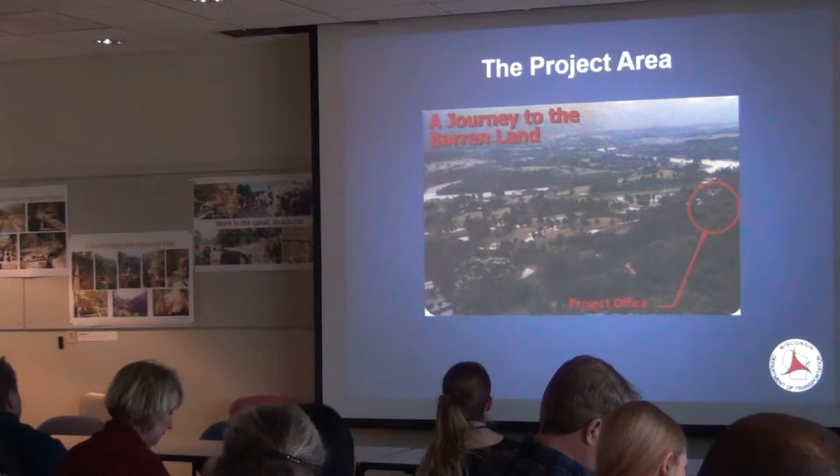I started my journey with great enthusiasm and a very strong attitude. It was to do something for the farmers and to make their life better. For me, it was like a marathon that I needed to win by making water available in their land.

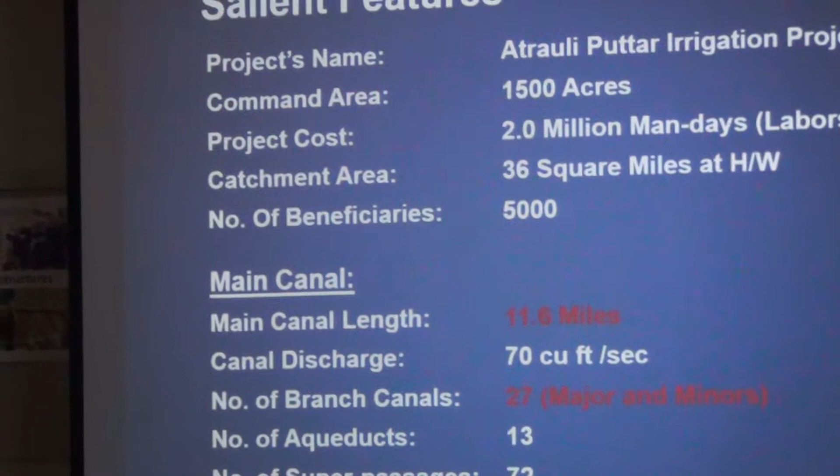Here are the salient features. The project name is Atrauli Puttar Irrigation Project. Command area, in round figures, 1,500 acres. And the project cost, I calculated in terms of labor days, 2 million labor days.

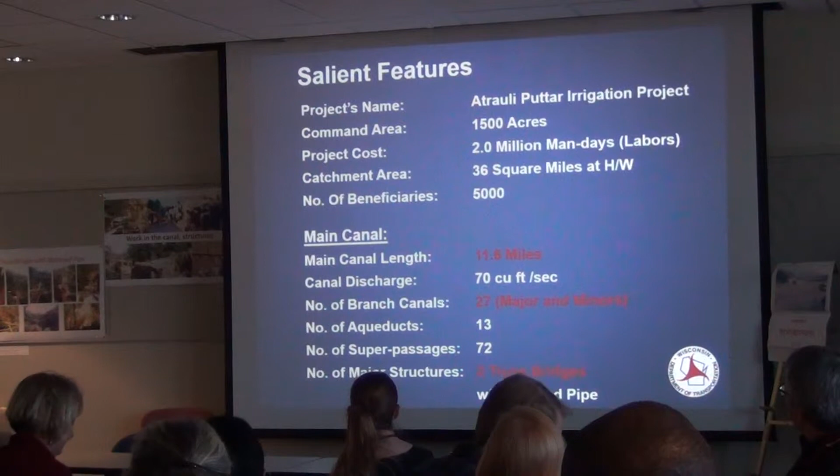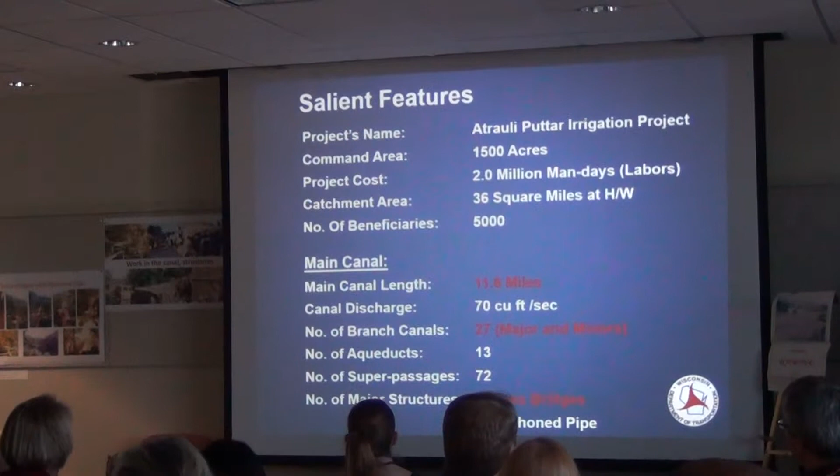Catchment area, 36 square miles, and the number of benefited farmers is 5,000 villagers. Main canal, 11.6 miles, and there are 27 branch canals. There are 2 challenging structures. They are a truss bridge and a siphon pipe.

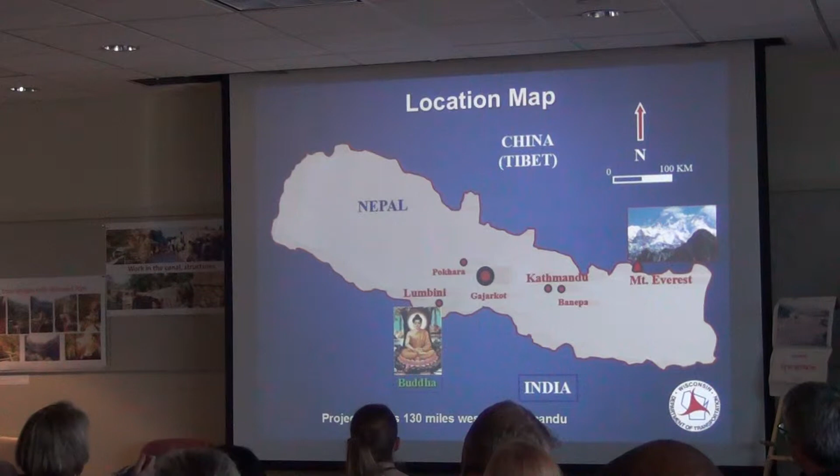Here is the location map, Nepal. In between India and China. Bounded by India from three sides, and separated from China by the high Himalayas. This is the project area. And just calculating, I know that it's less than 250 miles; aeronautical might be less than 250 miles. And again, it's less than 150 miles from Lumbini.

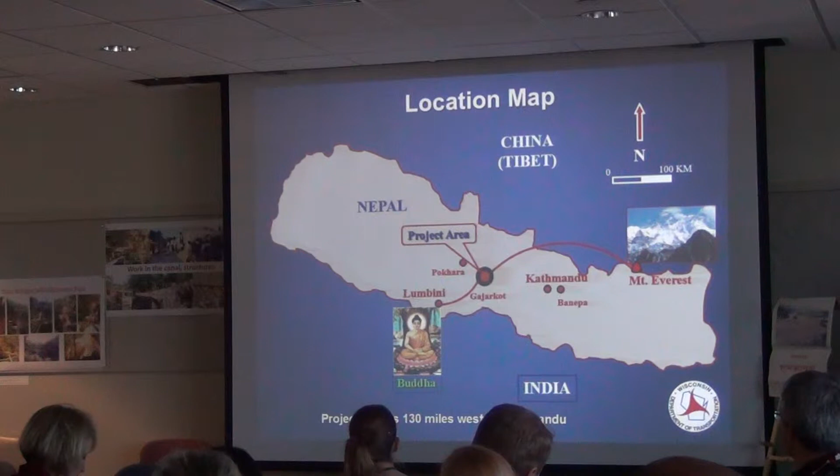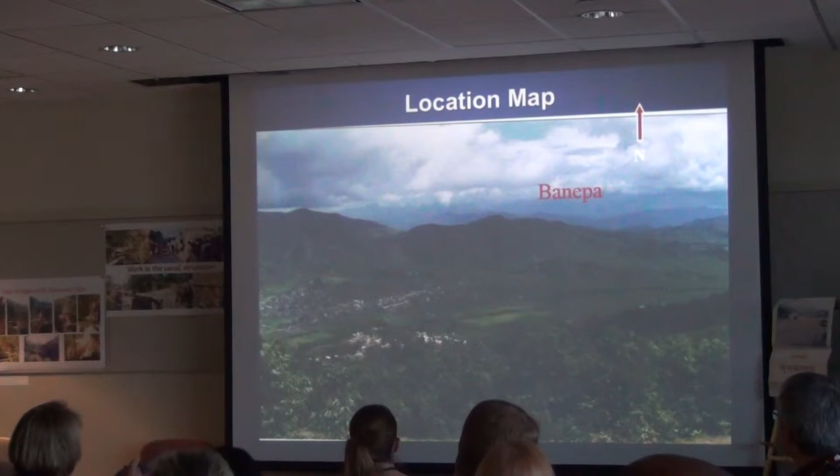Lumbini is the birthplace of Buddha. Buddha was born in Nepal. And it's 130 miles from Kathmandu, the capital. And I talked about my hometown, and here it is. This must be a little bit older photo because now it's very crowded.

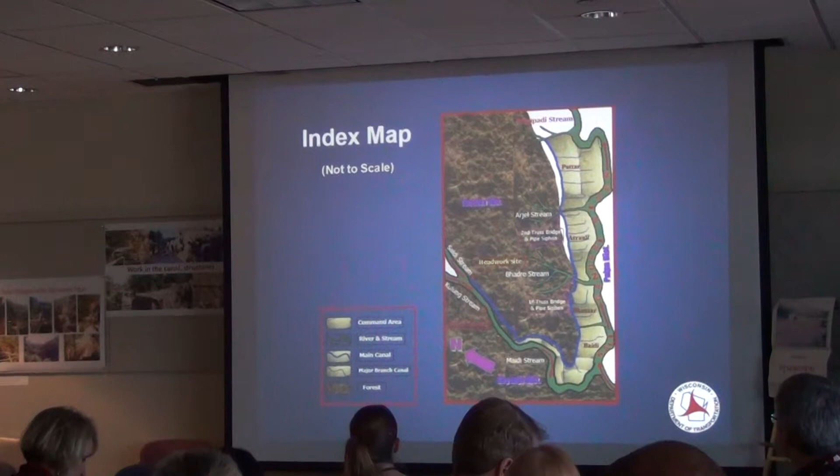Okay, here is the index map. It shows the jungle area; it's not to scale. These are the jungle area, and this is the yellow side. And the thick blue line is the main canal, and the thin blue lines are the major branch canals. And the green one, sorry, the green one is the command area.

Here is the source, the dream of 5,000 villagers. And we can see the steep slope that one has to walk, and I spent 3 years working for this area. This photo was snapped around 2.5 miles from the Gajarkot site, from where we need to trap the stream water for irrigation. And this is the structure to trap the irrigation water.

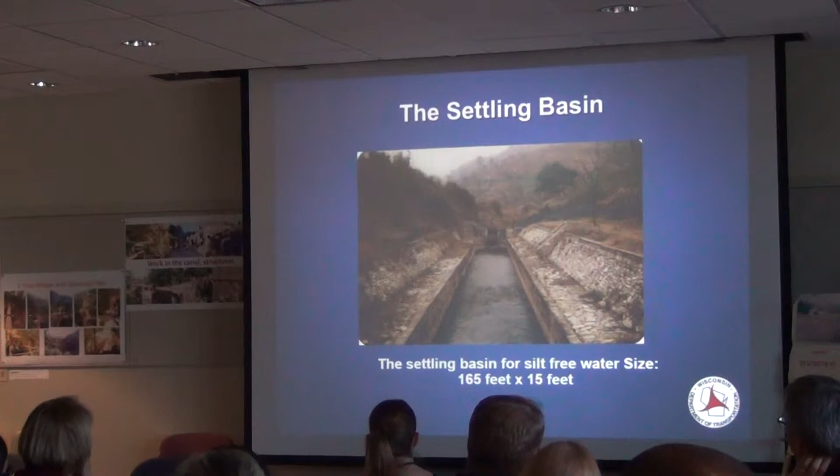We call it side intake. We provided a screen to prevent the boulders and gravel. This one. However, small particles like sand and small gravels flow along with water. They need to be separated before entering into the main canal, and this is done with the help of this settling basin. With the increase in the flow area, there will be a decrease in the flow velocity for the constant discharge, thus settling down the sediments.

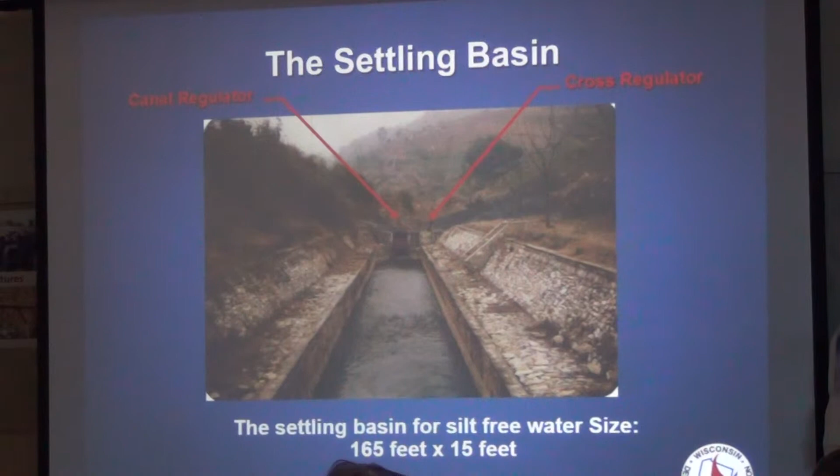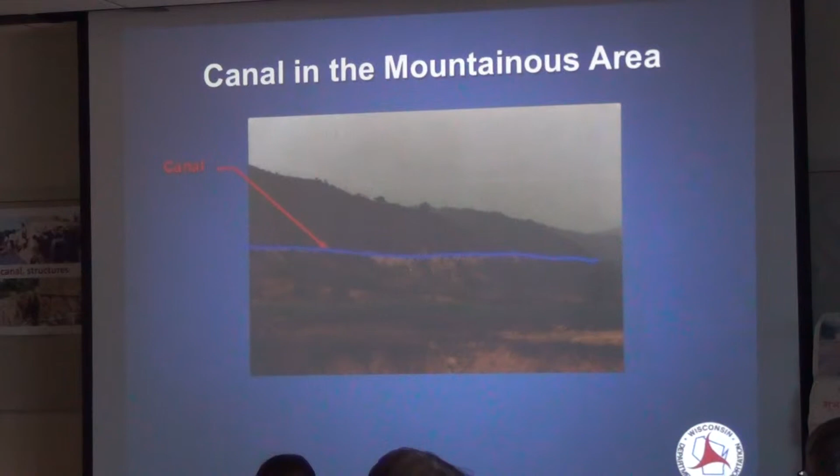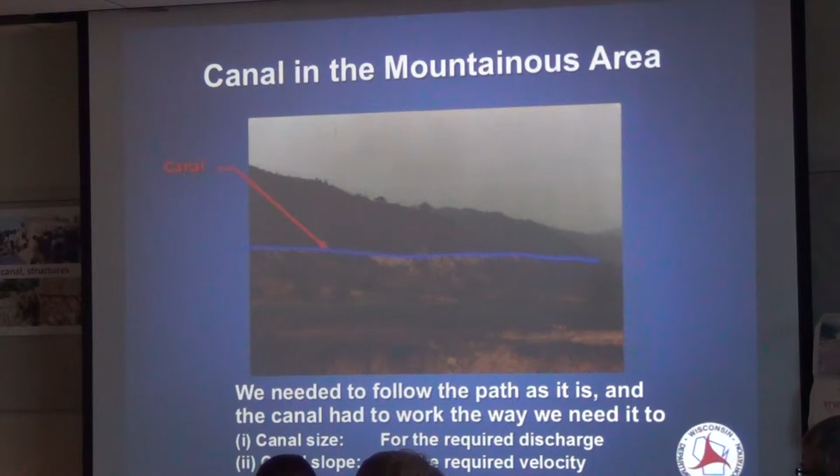Here is the canal in the mountainous area. We need to follow the path of the mountain. At the same time, we need to meet two requirements: the canal size for the required discharge and the canal slope for the required velocity. Velocity plays some role in the canal size too, but it needs to be within some limit because most of the canal is not lined; it is earthen. So we need to take care of the silting and scouring.

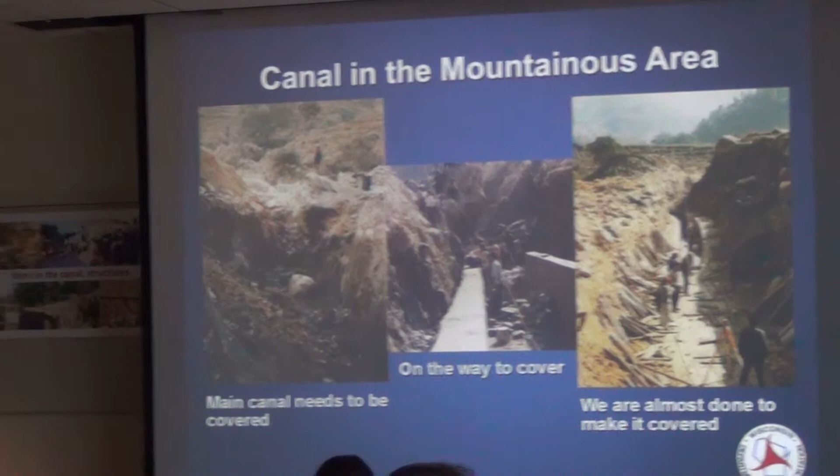And you see, if we are a little bit late, again we have the problem. So we need to hit the iron when it is hot, something like that. And retaining walls on the way to cover it, and this is almost done. So getting ready for the concrete slab later.

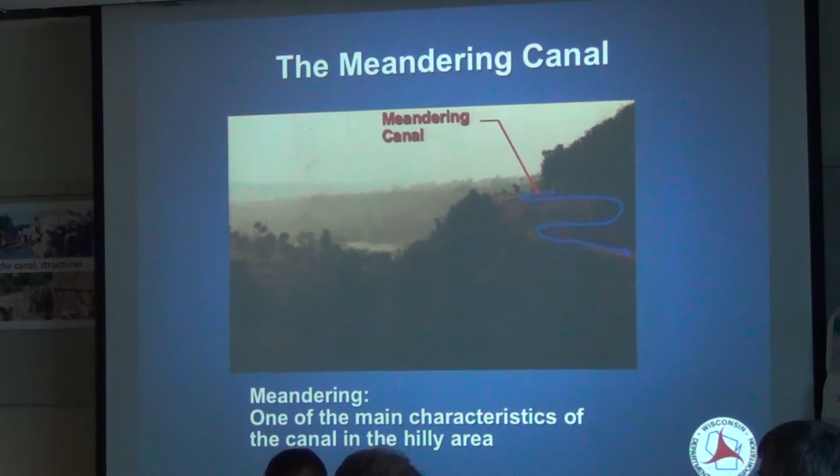And meandering is the main characteristic in the mountain area. So when it is meandering, there is scouring on the concave side, meaning the outward curve, and silting on the inward curve, and we need to work on that one too. And these canals, main canals, branch canals, and even the catch drains, I designed on the basis of Manning's formula. And apart from the canal and branch canals, we need to make so many structures before delivering the water

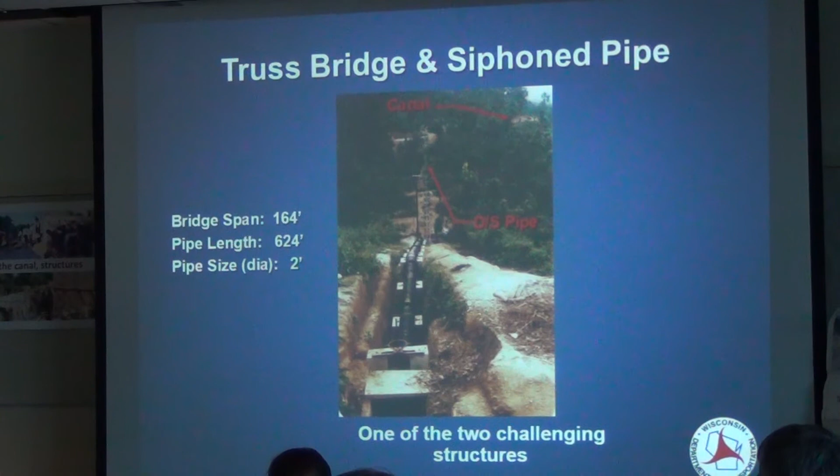to the farmers' fields. There are two challenging structures. They are truss bridges for siphon pipe. The construction of these two truss bridges shortened the canal length by 2.5 miles, two big loops in the jungle area, which made it very much easier for the farmers to operate the canal during the operation period. But the construction was not the easy one, because every part